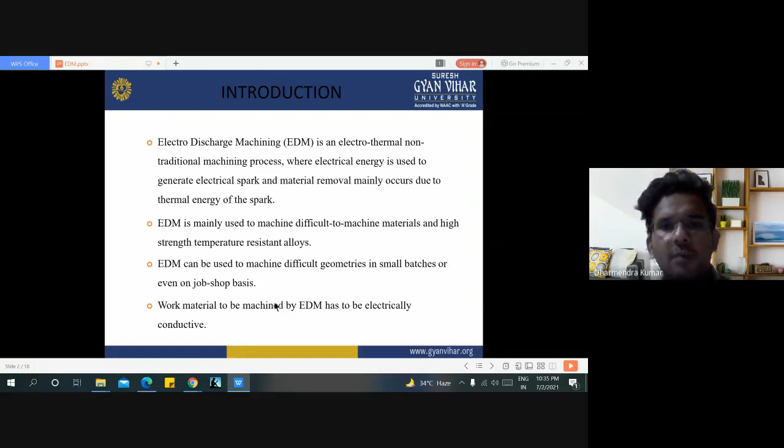The work material to be machined by EDM has to be electrically conductive. The major components of electric discharge machining are the electric power supply, workpiece and tool, dielectric medium, and servo control unit. Here we can see that we are using a DC pulse generator to complete the circuit in electric discharge machining.

The servo control motor is used to feed and maintain the gap between the workpiece and the cutting tool. The servo electric motor is associated with the tool holder, and the tool holder represents the negative charge here, while the workpiece represents the positive charge.

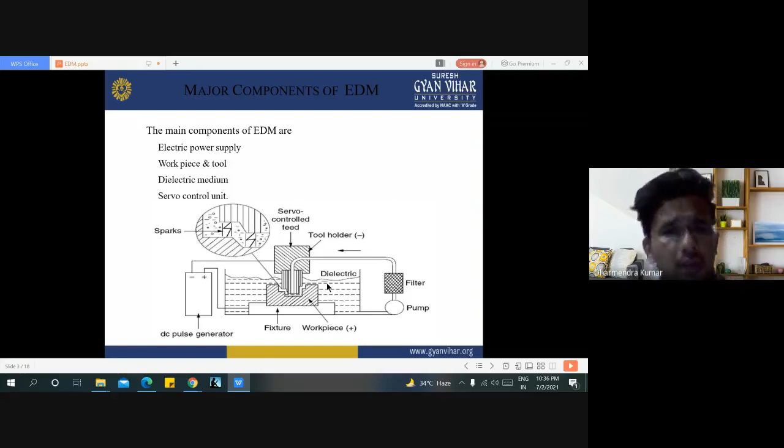Here is the filter we are using for the dielectric medium, because the function of the dielectric medium is also to separate small particles from the workpiece which dissolve into it. With the help of the pump, the dielectric fluid mixed with abrasive particles from the workpiece is sucked into the filter for the filtration process, and after filtration, the fresh dielectric fluid goes to the workpiece with the help of the tool holder.

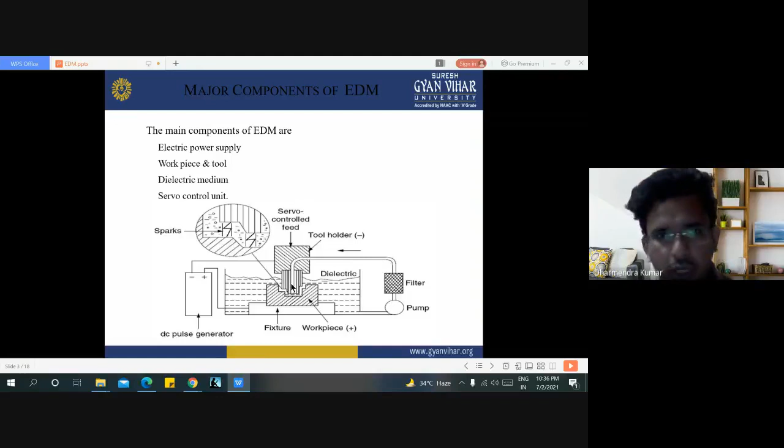Here is the working of electric discharge machining. In EDM, a potential difference is applied between the tool and the workpiece. Both the tool and the work material must be conductors of electricity. The tool and the work material are immersed in a dielectric medium, for which we use kerosene or deionized water.

There is always a gap maintained between the tool and the workpiece. Depending upon the applied potential difference and the gap between the tool and the workpiece, an electric field would be established. This is also part of the working.

The tool is connected to the negative terminal of the generator, and the workpiece is connected to the positive terminal. As the electric field is established between the tool and the job, the free electrons on the tool are subjected to electrostatic forces. Due to cold emission, the work function or bonding energy of the electron is less, so electrons are emitted from the tool. Such emission of electrons is called cold emission.

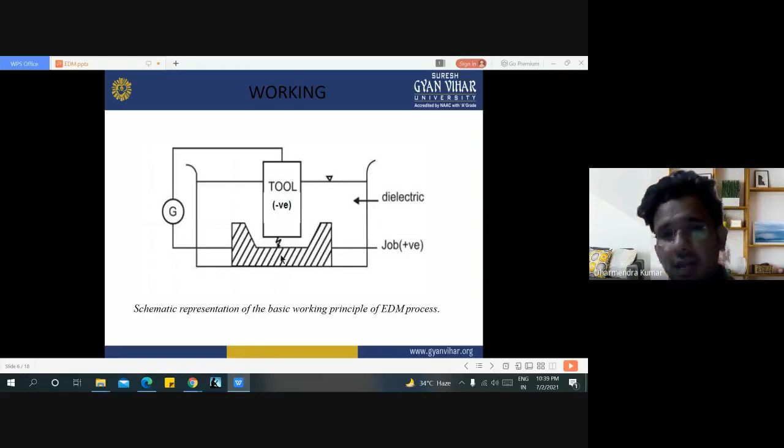Here is the working diagram of electric discharge machining. The tool is associated with the negative charge and the workpiece or job is associated with the positive charge. When we supply current, the negative charge moves toward the positive charge and the positive charge moves toward the negative charge, creating a potential difference between them. Heat is generated at this area, and due to this heat, vaporization or melting of the workpiece takes place, completing the machining process.

Now here are some basic properties or requirements of the electrode in the EDM process. The electrode material should be such that it does not undergo much tool wear when impinged by positive ions. Thus, the localized temperature rise has to be kept less by properly choosing its properties, so that even when temperature increases, there would be less melting.

High electric conductivity: electrons are cold emitted more easily, and there is less bulk electrical heating. High thermal conductivity is also a requirement of the electrode used in the EDM process, because for the same heat load, the local temperature rise would be less due to faster heat conduction to the bulk of the tool. Thus, tool wear is less.

The electrode material must also have a higher density. For the same heat load and the same tool wear by weight, there would be less volume removal or tool wear, and thus less dimensional loss or inaccuracy. It should also have a high melting point.

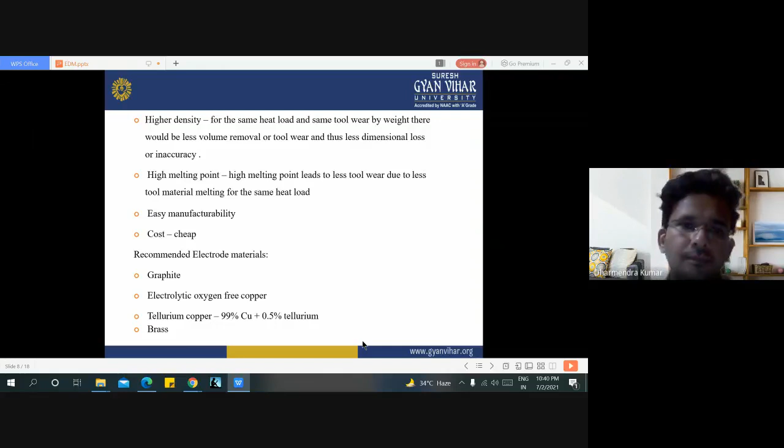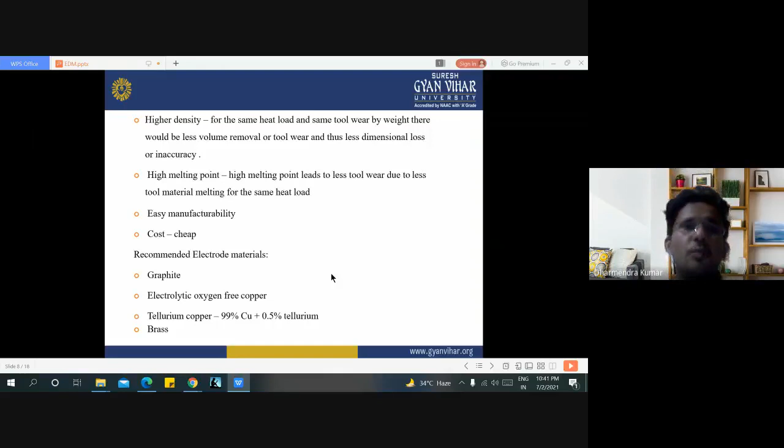High melting point leads to less wear due to less tool material melting for the same heat load. Easy manufacturability, and if you're talking about cost, then manufacturing cost is cheapest for the electrode. Recommended electrode materials are graphite, electrolytic oxygen-free copper, tellurium copper (99% copper plus 0.5% tellurium), and brass, which we are commonly using as electrode material.

Here are some basic properties and functions of dielectric material. Material removal mainly occurs due to thermal evaporation and melting. As thermal processing is required to be carried out in absence of oxygen, the process can be controlled and oxidation avoided. Oxidation often leads to poor surface conductivity of the workpiece, hindering further machining. Dielectric fluid should provide an oxygen-free machining environment.

Because if there is any presence of oxygen, then there are chances of corrosion taking place at the workpiece or at the tool piece. Further, it should have strong enough dielectric resistance so that it does not break down electrically too easily. But at the same time, it should ionize when electrons collide with its molecules. Moreover, during sparking, it should be...

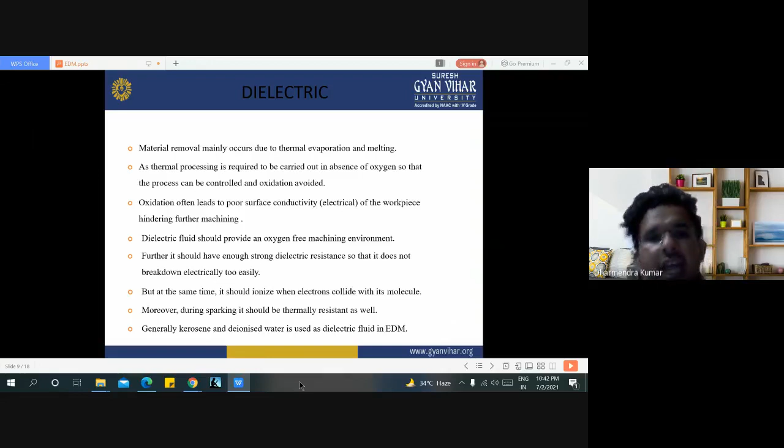...thermally resistant as well, as generally kerosene and deionized water are used as dielectric medium in electric discharge machining. Tap water can't be used as it ionizes too early and thus breaks down due to the presence of salts as impurities. We can't use water with impurities as a dielectric medium in electric discharge machining.

Dielectric medium is generally flushed around the spark zone. It is also applied through the tool to achieve efficient removal of molten material.

There are three important functions of dielectric medium in electrical discharge machining: it insulates the gap between the tool and the work, thus preventing a spark from forming until the gap voltage is correct; it cools the electrode and workpiece and solidifies the molten metal particles; and it flushes the metal particles out of the workpiece gap to maintain ideal cutting conditions, increasing metal removal rate.

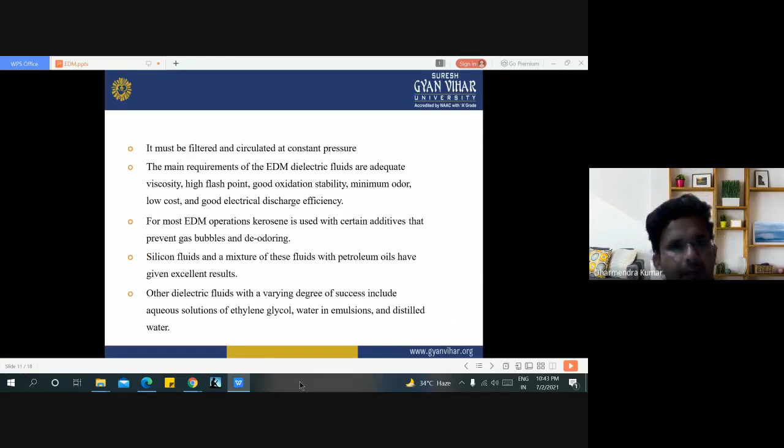It must be filtered and circulated at constant pressure with the help of a pump and filter. The main requirements of the EDM dielectric fluid are adequate viscosity, high flash point, good oxidation stability, minimum odor, low cost, and good electrical discharge efficiency.

For most EDM operations, kerosene is used with certain additives that prevent gas bubbles and reduce odor. Silicon fluids and a mixture of these fluids with petroleum oils have given excellent results. Other dielectric fluids we use with varying degrees of success include aqueous solution of ethylene glycol, water-in-oil emulsions, and distilled water.

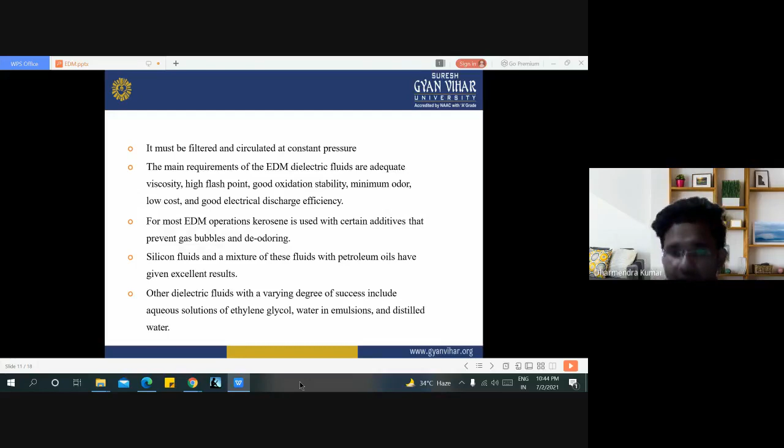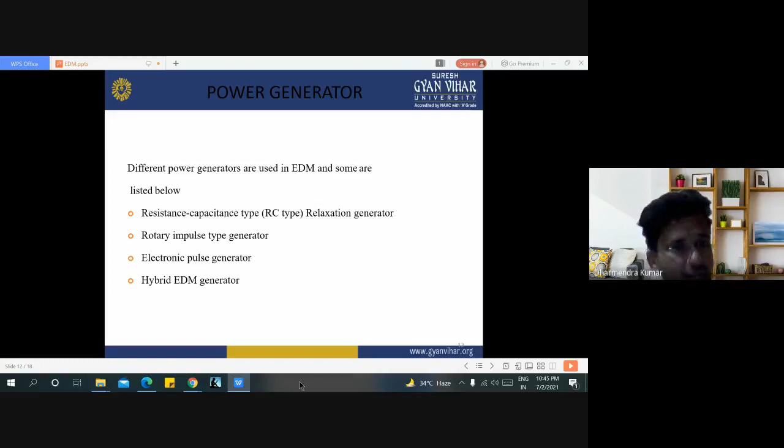Here are some basic properties and functions of the power generator used in electric discharge machining. Like resistance-capacitance type (RC type) relaxation generator, rotary impulse type generator, electronic pulse generator, and hybrid EDM generator types, we use these for power generation in the electric discharge machining process.

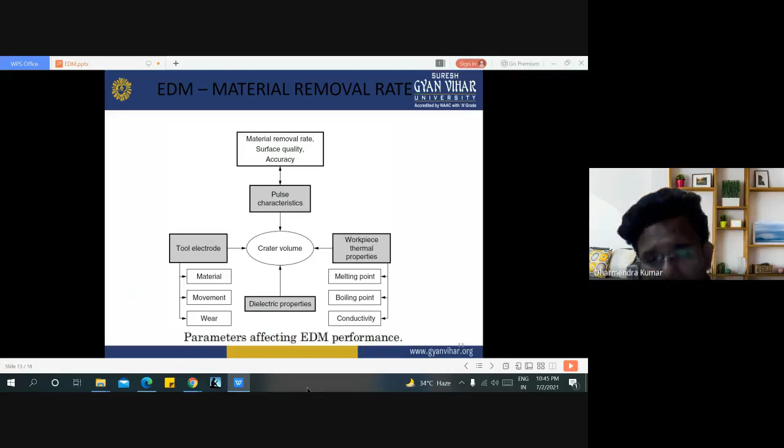Here is the flow chart of the material removal rate in electric discharge machining. It depends on various factors, including melting point, boiling point, and conductivity related to the workpiece's thermal properties. And if we talk about the tool electrode, then the type of material used for making the tool electrode, the movement of the tool electrode, and the rate of wear occurring in the tool electrode are also factors. These factors directly affect the material removal rate, and various dielectric properties also affect the material removal rate in the EDM process.

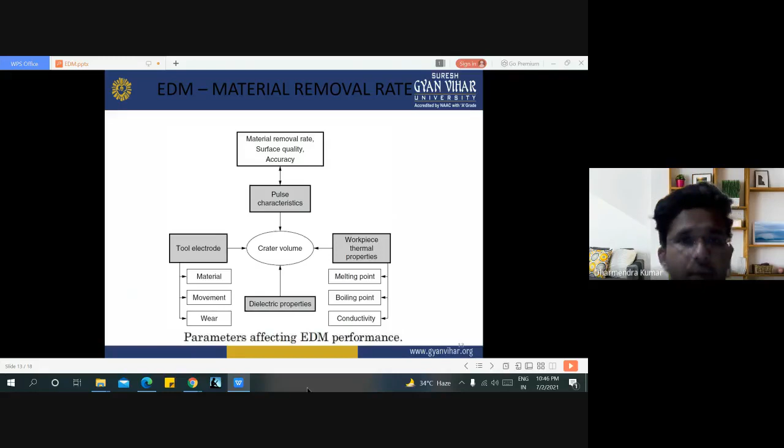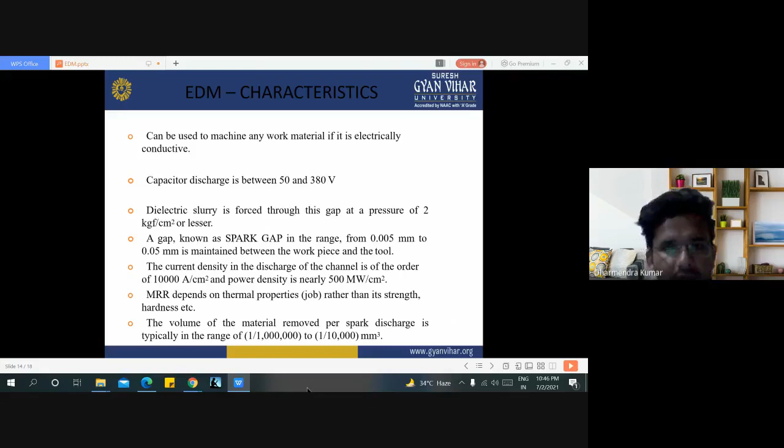Here are some EDM characteristics: it can be used to machine any work material if that material is electrically conductive. Capacitor discharge is between 50 to 380 volts. Dielectric slurry is forced through this gap at a pressure of 2 kgf per centimeter square or lesser. A gap known as the spark gap, in the range of 0.005 mm to 0.05 mm, is maintained between the workpiece and the tool. The current density in the discharge channel is on the order of 10,000 amperes per centimeter square, and the power density is nearly 500 megawatts per centimeter square.

MRR depends on the thermal properties of the job or workpiece rather than its strength and hardness.

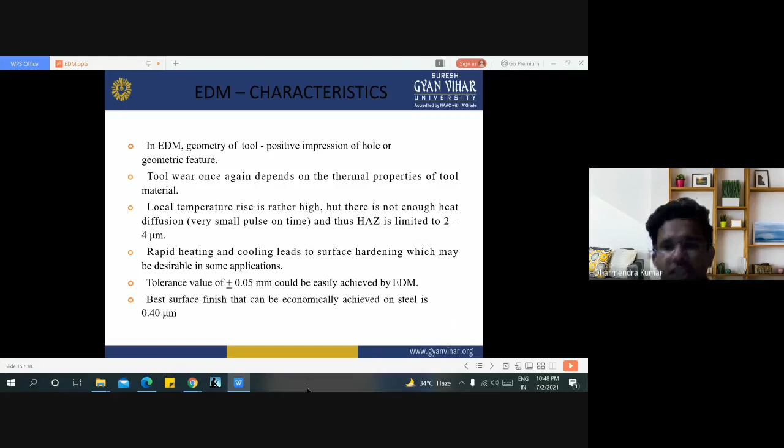Rapid heating and cooling leads to surface hardening, which may be desirable in some applications. A tolerance of plus minus 0.05 mm could be easily achieved by EDM. The best surface finish that can be economically achieved on steel is 0.40 micron.

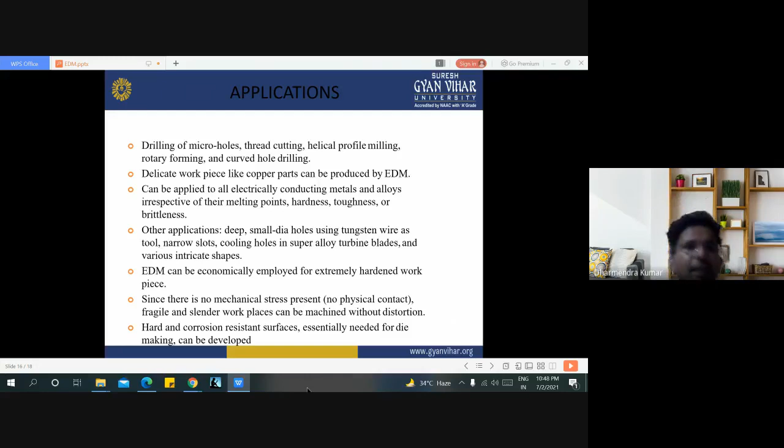Here are some applications of electric discharge machining: drilling of micro holes, thread cutting, helical profile milling, rotary forming, and curved hole drilling. Delicate workpieces like copper parts can be produced by EDM, and it can be applied to all electrically conducting metals and alloys irrespective of their melting point, hardness, toughness, or brittleness. Other applications include deep small diameter holes using a tungsten wire as a tool, narrow slots, and cooling holes in superalloy turbine blades, as well as various intricate shapes.

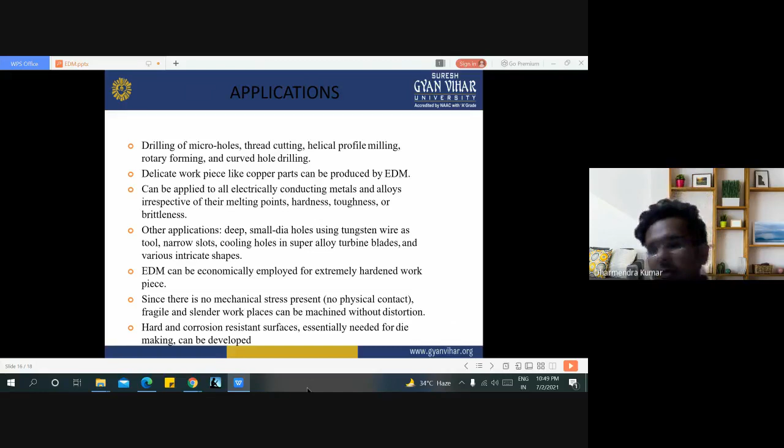EDM can be economically employed for extremely hardened workpieces since there is no mechanical stress or physical contact present. Fragile and slender workpieces can be machined without any distortion. Hard and corrosion resistant surfaces, essentially needed for die making, can be developed with the help of electric discharge machining. Here are various advantages of EDM, such as the ability to produce complex shapes that would otherwise be difficult to produce with conventional cutting tools.

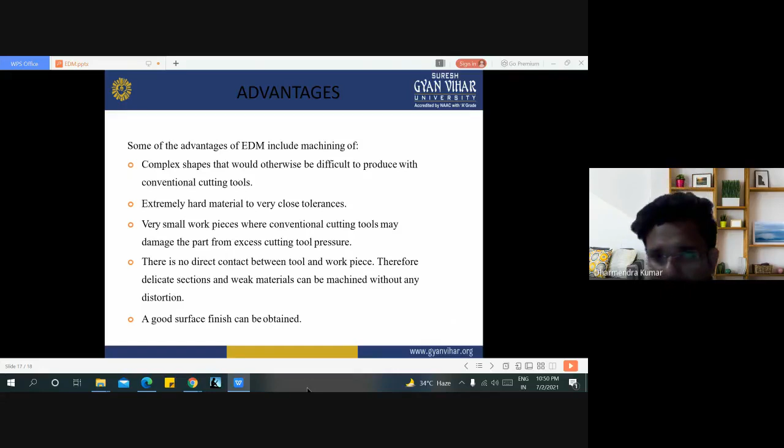Extremely hard material can be machined to very close tolerance with EDM. It is suitable for very small workpieces where conventional cutting tools may damage the part due to excess cutting tool pressure. There is no direct contact between the tool and the workpiece, so delicate sections and weak materials can be machined without any distortion. A good surface finish can also be obtained with this process.

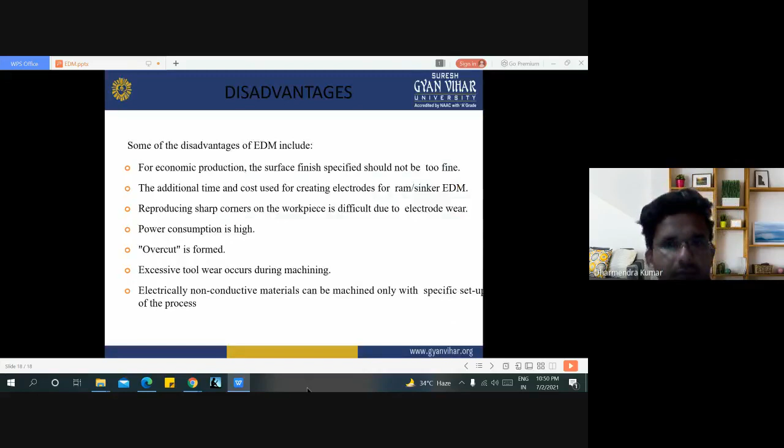Here are some disadvantages of the EDM process. For economic production, the surface finish should not be too fine. There is additional time and cost used for creating the electrode for ram or sinker EDM. Reproducing sharp corners on the workpiece is difficult due to electrode wear, and power consumption is too high.

Overcut is formed on the workpiece. Excessive tool wear occurs during the machining process because of the transferring of ions from the positive to negative and negative to positive terminal. Electrically non-conductive material can be machined only with a specific setup of the process, but generally we use only conductive material for the EDM machining process.

This is the overall overview of electric discharge machining. In this chapter, we learned the definition of electric discharge machining, its working principle, the various components associated with it, its advantages, disadvantages, and applications. We have also seen the function of various components associated with electric discharge machining.

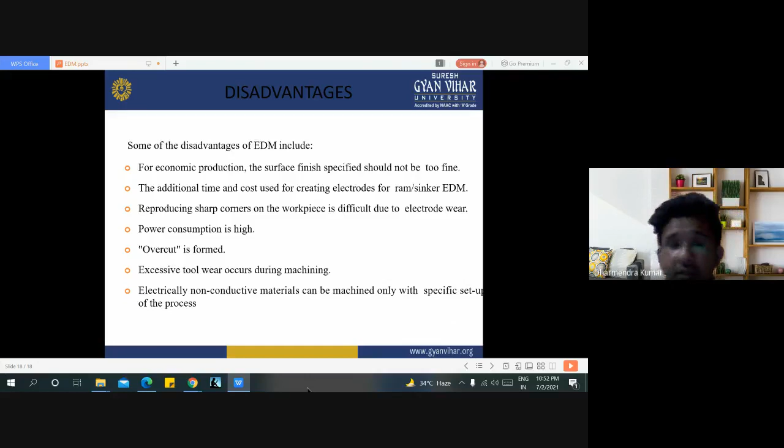In the next chapter, we will discuss another non-conventional manufacturing process, or another newer machining process, in detail.

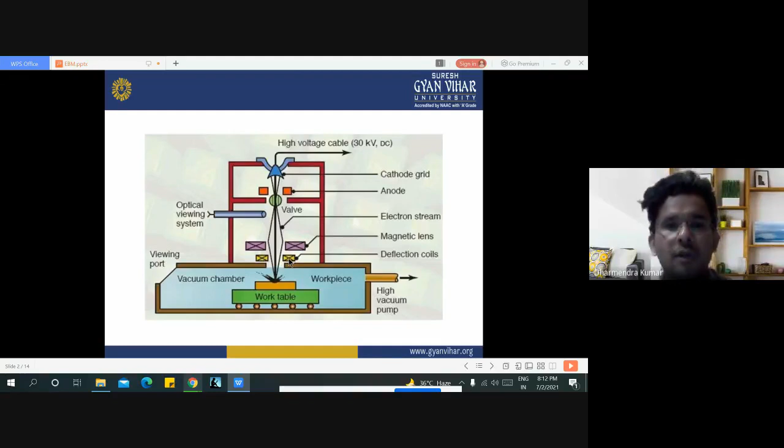The electron stream goes to the workpiece. There is a magnetic lens for the accumulation of the beam on the workpiece, and deflection coils, which are used here for deflecting the electron stream coming from the high voltage cable and going to the workpiece. Here are the basic principles of the electron beam machining process.

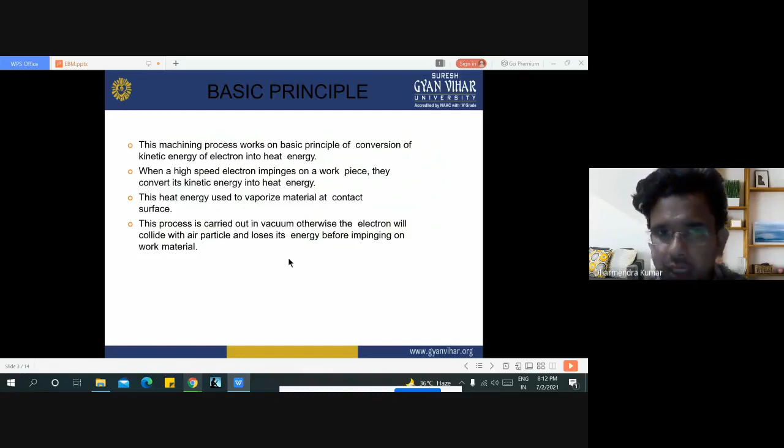This machining process works on the basic principle of conversion of kinetic energy of electron into heat energy. When a high-speed electron impinges on a workpiece, it converts its kinetic energy into heat energy. This heat energy is used to vaporize material at the contact surface.

This process is carried out in a vacuum. Otherwise, the electron beam would collide with air particles and lose its energy before impinging on the work material. These are the basic principles of electron beam machining.

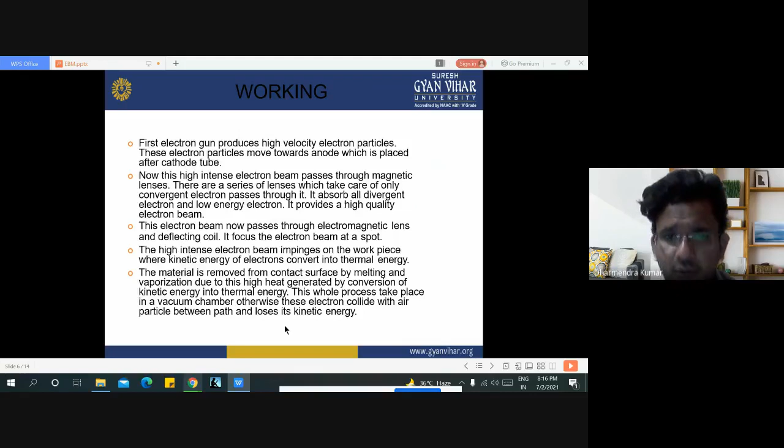The high intensity electron beam impinges on the workpiece, where the kinetic energy of the electron converts into thermal energy. The material is removed from the contact surface by melting and vaporization due to this high heat generated by the conversion of kinetic energy into thermal energy.

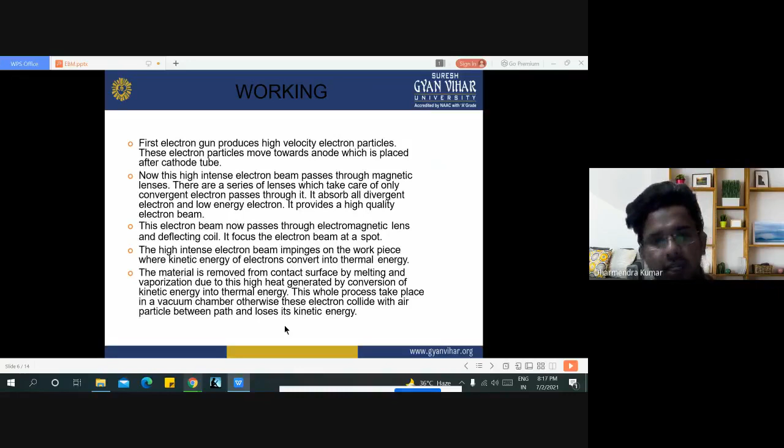This whole process takes place in a vacuum chamber. Otherwise, these electrons would collide with air particles along the path and lose all their kinetic energy.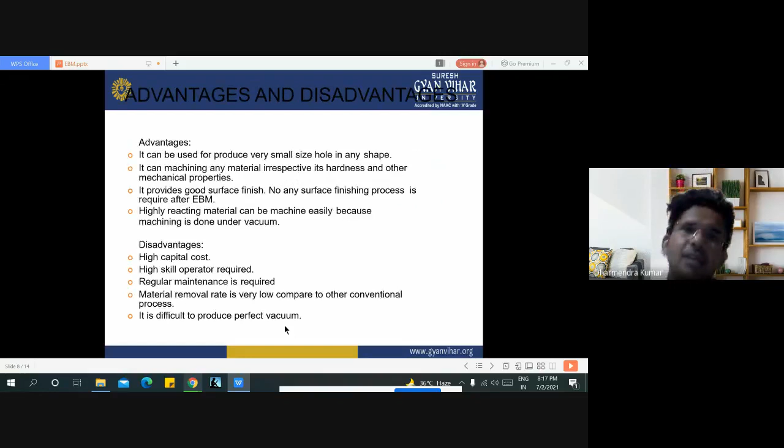Here are the various disadvantages and advantages of the electron beam machining process. Advantages of EBM include: it can be used to produce very small hole sizes in any shape, and it can machine any material irrespective of its hardness and other mechanical properties.

It provides good surface finish, so no surface finishing process is required after EBM. Highly reactive material can be machined easily because machining is done under vacuum.

Here are some disadvantages of electron beam machining: high capital cost, high skill operator required, regular maintenance is required, material removal rate is very low compared to other conventional processes, and it is difficult to produce a perfect vacuum. These are some disadvantages of electron beam machining process.

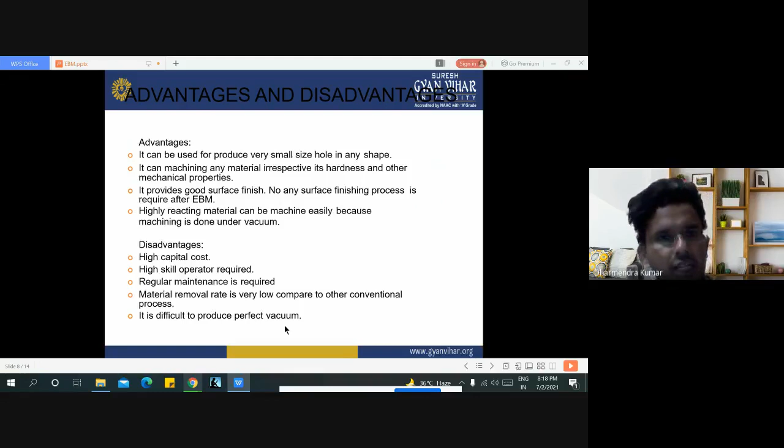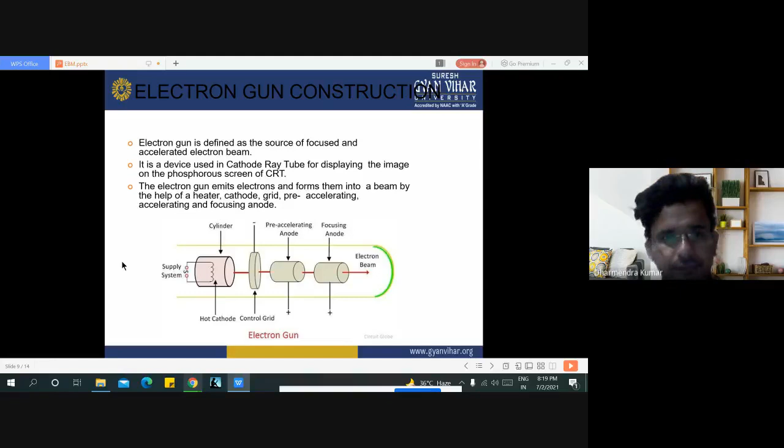Electron gun is defined as the source of focused and accelerated electron beam. It is a device used in cathode ray tube for displaying the image on the phosphorus screen of CRT, cathode ray tube. The electron gun emits electrons and forms them into a beam with the help of a heater, cathode grid, and pre-accelerating, accelerating, and focusing anode. This is the basic construction of electron gun.

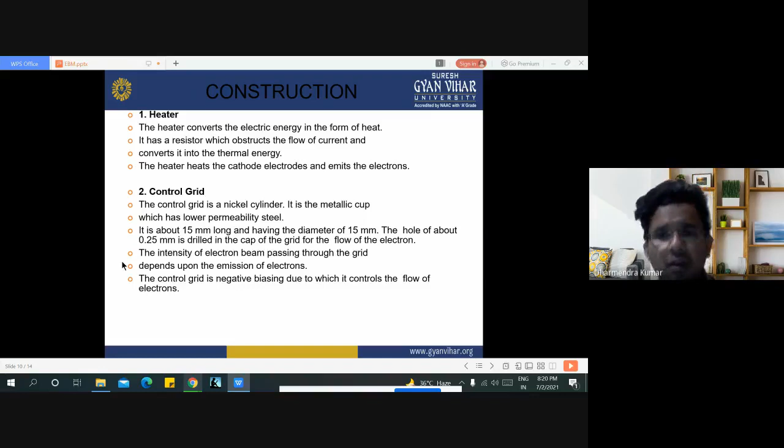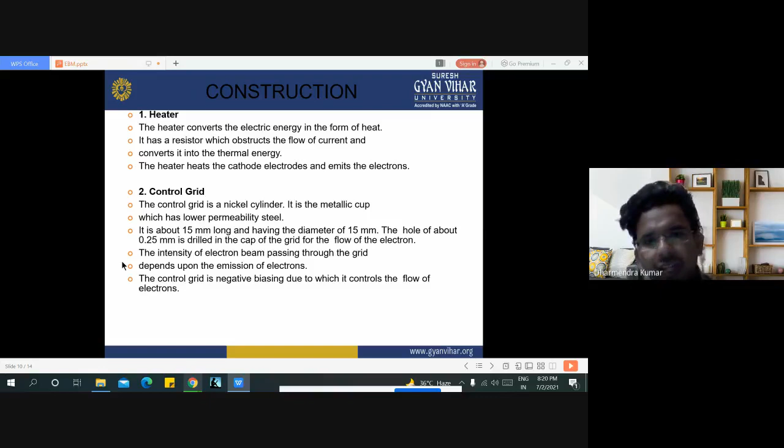Now the control grid. The control grid is a nickel cylinder. It is a metallic cup which has low permeability steel. It is about 15 mm long and has a diameter of 15 mm. A hole of about 0.25 mm is drilled in the cap of the grid for the flow of electrons. The intensity of the electron beam passing through the grid depends upon the emission of electrons. The control grid is negatively biased, due to which it controls the flow of electrons.

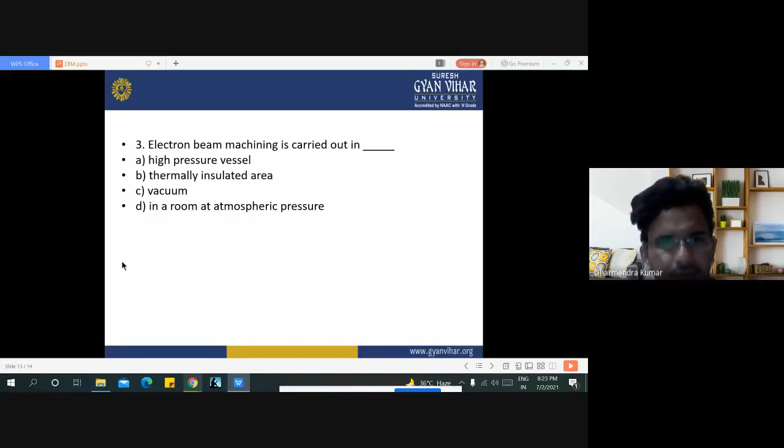Now another multiple choice question: electron beam machining is carried out in a high pressure vessel, thermally insulated area, vacuum, or in a room at atmospheric pressure. Then surely it would be vacuum. We have created the vacuum for better transmission of the electron beam to the workpiece. Our option is C. Now the fourth one: during EBM, what is kept under vacuum? Electron gun, whole setup, and the workpiece.

Overall in this chapter we have seen the working of electron beam machining process, advantages of electron beam machining process, disadvantages of electron beam machining process, and principle and application of electron beam machining process. On the basis of this video lecture we have solved four to five multiple choice questions. Thank you all.

Hello everyone. In this video lecture, we will discuss multi-point cutting tools, different types of multi-point cutting tools, requirements of cutting tools, requirements of multi-point cutting tools, and the various differences between single point cutting tool and multi-point cutting tool. Now let's start.

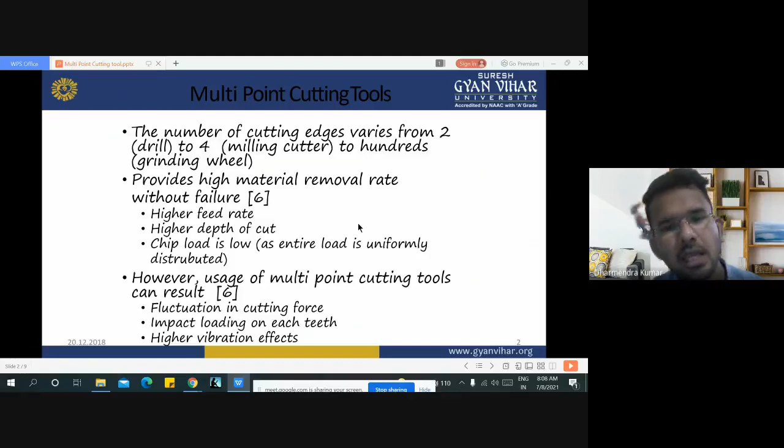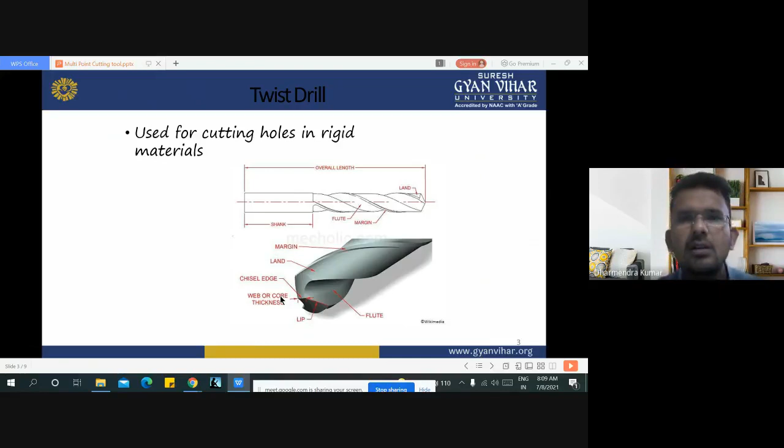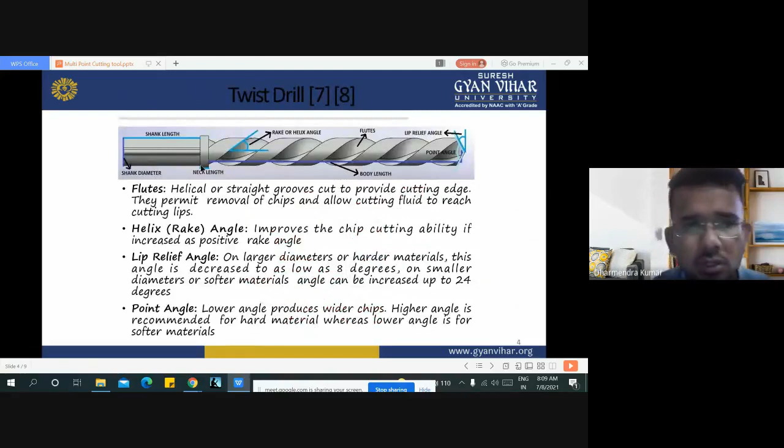This is a type of multi-point cutting tool which has 2 cutting edges. Here are the overall parts of the twist drill: shank diameter, shank length. We have seen that in a single point cutting tool, the shank is one part and the face is another part. On the faces,

there are many angles possessed on the face for the purpose of cutting. This is known as rake or helix angle. This is the flute we have discussed earlier. Lip relief angle, this is known as the tip of the drill bit. This is the point angle, and overall this is known as the body length.

Let's discuss one by one. Flutes: these are helical or straight grooves cut to provide a cutting edge. They permit removal of chips and allow cutting fluid to reach the cutting lips. Helix or rake angle improves the chip cutting ability if increased, as a positive rake angle.

Lip relief angle: on larger diameter or harder material, this angle decreases to as low as 8 degrees. On a smaller diameter or softer material, the angle can be increased up to 24 degrees. It depends on the operator, meaning which type of material we are using. If we use harder material, the lip relief angle is as low as 8 degrees, and if we use softer material, the value of relief angle will be up to 24 degrees.

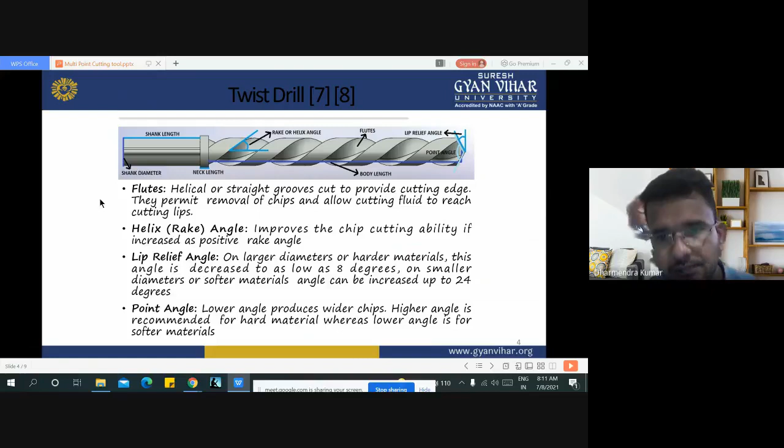Point angle: lower angle produces wide chips. Higher angle is recommended for hard material, whereas lower angle is for softer material. Like relief angle, in point angle also, if we use a softer material, then a lower angle is necessary, and if we use harder material, then a higher angle is necessary as the point angle in the twist drill.

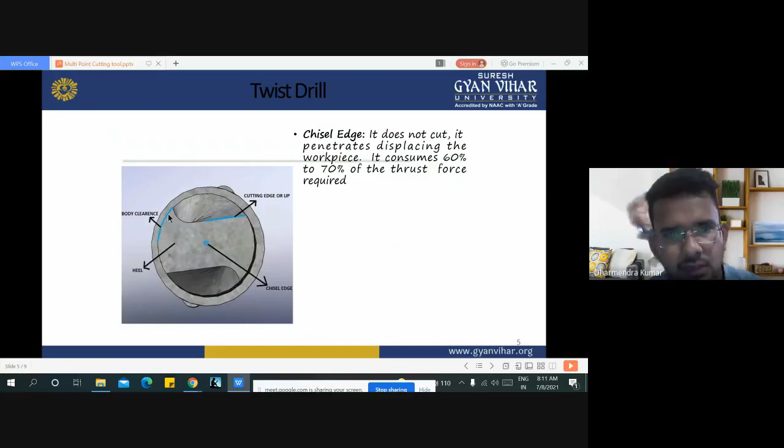This is also a view of the twist drill. This is known as the chisel edge at the tip of the drill bit. This is the body clearance, cutting edge, and this is known as the heel.

Chisel edge: it does not cut, it penetrates, displacing the workpiece. It consumes 60 to 70% of the required thrust force, because it is the main point which is first in direct physical contact between the drill bit and the workpiece. Thus, it consumes 60 to 70% of the thrust force.

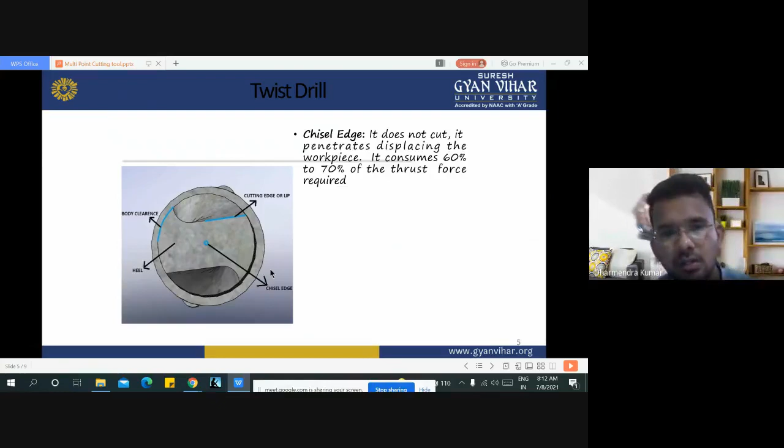The best tool geometry angle according to material, like workpiece material - we are using aluminum, brass, cast iron, mild steel, stainless steel, or plastic. For aluminum, point angle varies from 90 to 135, helix angle 32 to 48, lip relief angle 12 to 26, all values in degrees.

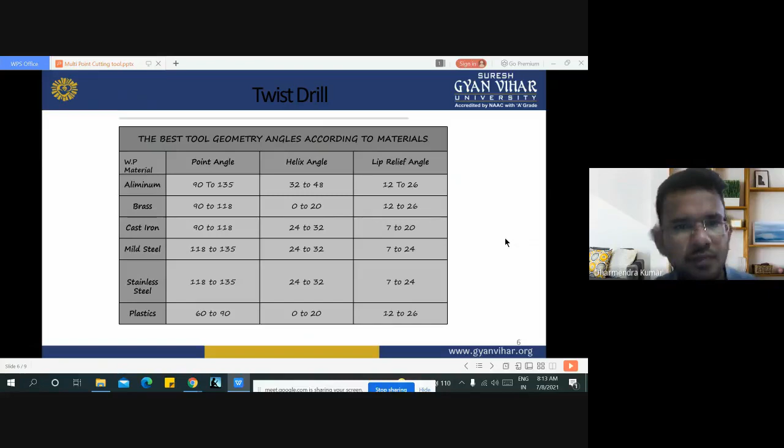For brass, point angle is 90 to 118, helix angle 0 to 20, lip relief angle 12 to 26. For cast iron, point angle is again 90 to 118 degrees, helix angle 24 to 32, lip relief angle 7 to 20. For mild steel, point angle varies from 118 to 135, helix angle 24 to 32, lip relief angle 7 to 24. For stainless steel, point angle is 118 to 135, helix angle 24 to 32 degrees, and lip relief angle is 7 to 24 degrees.

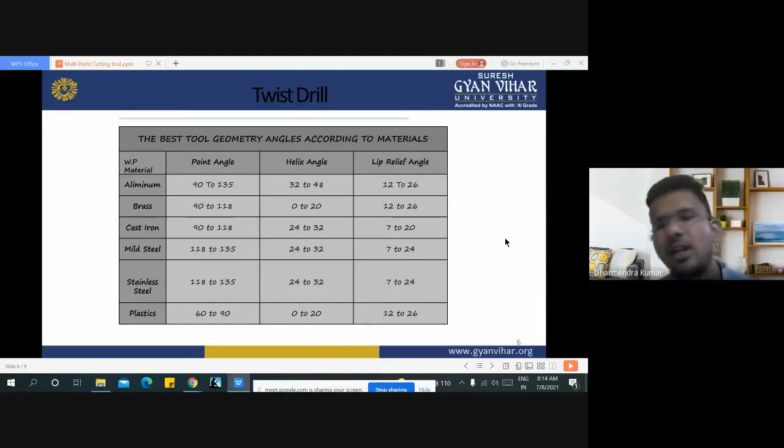For plastics, point angle varies from 60 to 90, because we know that we use a lower point angle if we cut softer material. Helix angle will be 0 to 20 degrees, and lip relief angle varies from 12 to 26 degrees. This is the overall tool geometry on the basis of the workpiece material which you are using for cutting, machining, or drilling process.

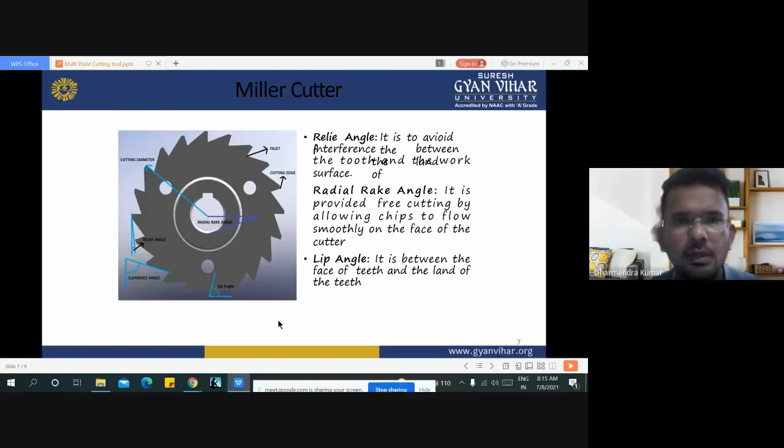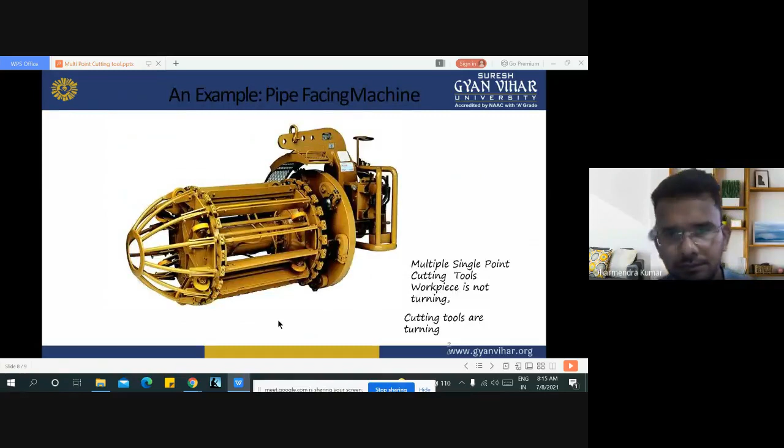Here is an example of a pipe facing machine, where we use multiple single point cutting tools. This shows the differences between single point cutting tool and multi point cutting tool.

We discussed in the previous chapter about single point cutting tool, and in this video lecture we have discussed multi point cutting tool. Now these are the basic differences.

Single point cutting tool is easy to design and fabricate, whereas multi point cutting tool has small chip load per tooth. Design consideration is harder compared to single point cutting tool because here cutting edges are two or more.

Single point cutting tool is comparatively cheaper, but multi point cutting tool is comparatively costly because of grinding of various teeth, various cutting edges on the multi point cutting tool.

Single point cutting tool has a high tool wear rate because there is one and only one cutting edge, whereas multi-point cutting tool gives high material removal rate, MRR, and productivity.

It gives high material removal rate and productivity. These differences are based mainly on the fact that in the multi-point cutting tool there are two or more cutting edges, but in single point only one cutting edge.

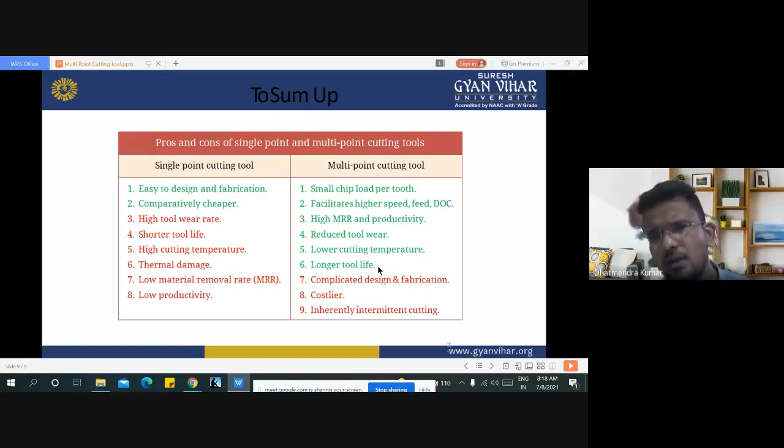But the heat generated at the contact point of multi-point cutting tool and the workpiece is much lower than in single point cutting tool, so thermal damage is much less since temperature does not rise as much at the contact point. Thus, it improves the overall tool life of the multi-point cutting tool.

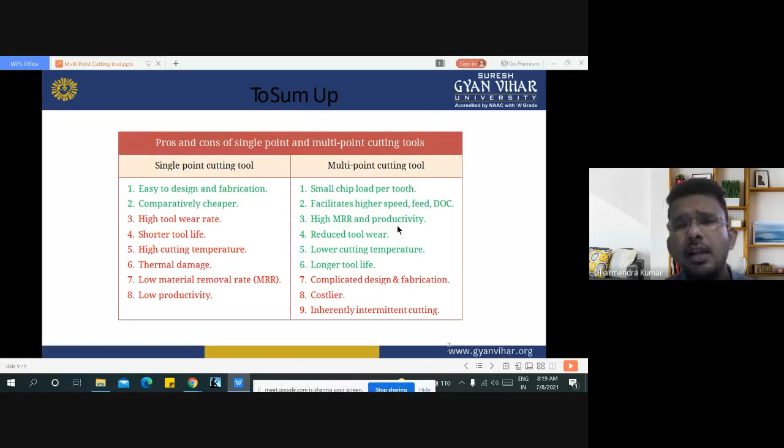Single point cutting tool provides low material removal rate, while multi point produces high material removal rate and productivity. The rate of production is high when using multi-point cutting tool, while it is slower with single point.

Low productivity affects overall production rate. Multi point cutting tool is somehow costlier than single point because in the manufacturing process, designing the multi-point cutting tool is harder since we have to groove two or more cutting edges on it.

These are the basic differences between multi-point and single point cutting tools. In these two videos we have discussed single point cutting tool and multi-point cutting tool, its necessity, and its types.

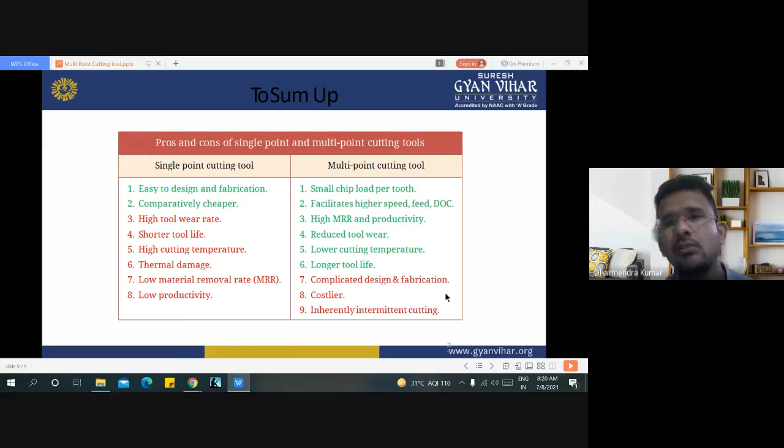In this video we discussed two types, drill bit and milling cutter, the various angles associated with the drill bits and the milling cutter, and the overall differences between single point cutting tool and multi-point cutting tool.